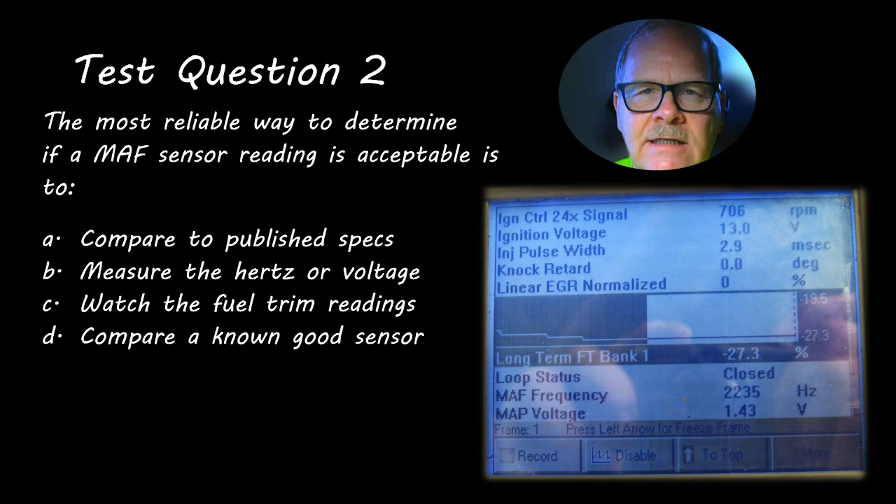Test question 4: Which of the following is continuously monitored? TP and ECT sensor, catalyst and evap, EGR and fuel trim, or hydrocarbon factor?

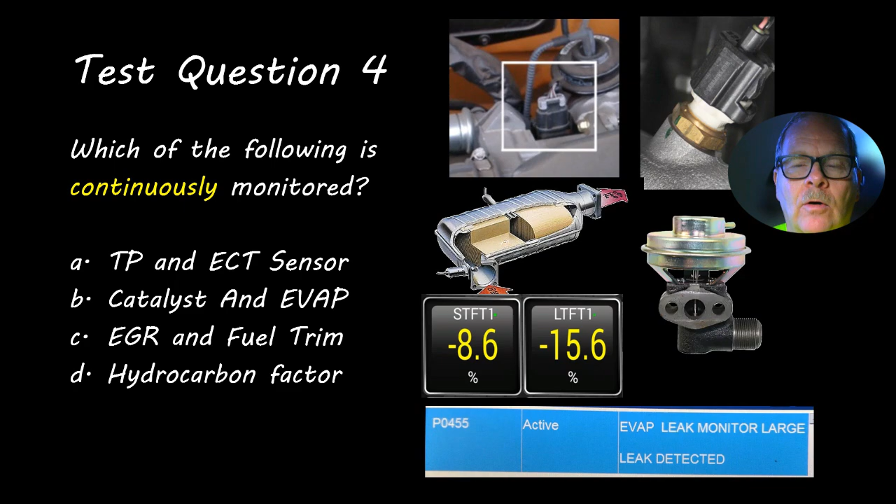Test question 5: Which of the following is least likely to be the cause of induction backfire? A, lean air fuel mixture, B, bad mass airflow sensor, C, downstream O2 sensor, or D, crossed plug wires.

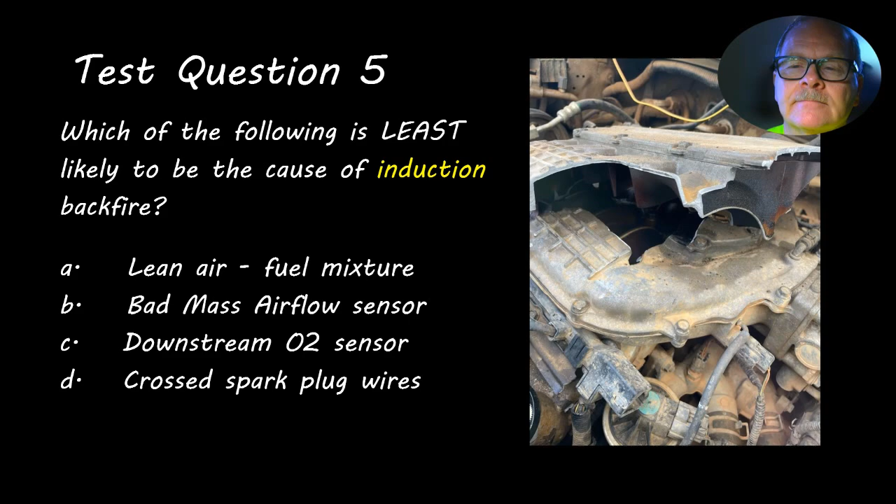Test question 6: O2 sensor values that read lean on hard acceleration may be caused by A, uncommanded EGR flow, B, kinked or pinched return line, C, fuel pump circuit voltage drop, or D, stuck closed injector relay.

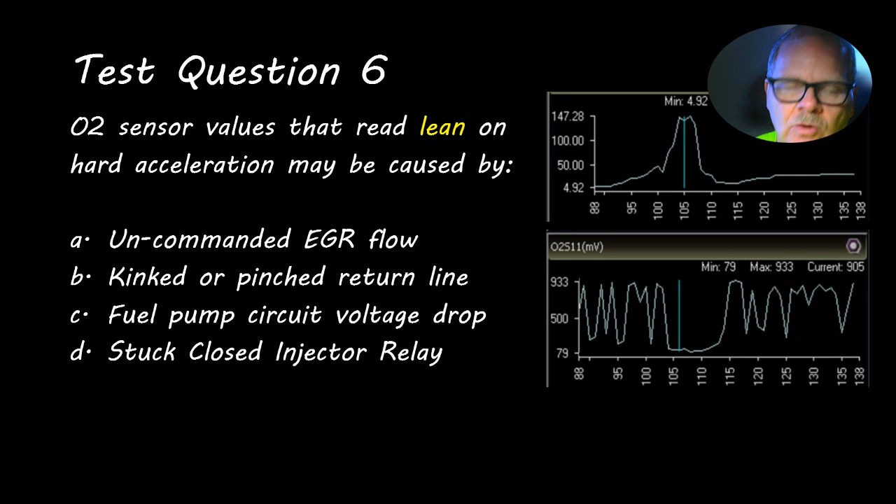Test question 7: A suddenly misfiring cylinder due to a bridged spark plug can cause A, a lean O2 signal and higher fuel trims, B, a rich O2 signal and lower fuel trims, C, all injectors to begin to fire sequentially, or D, unauthorized evap and EGR activation.

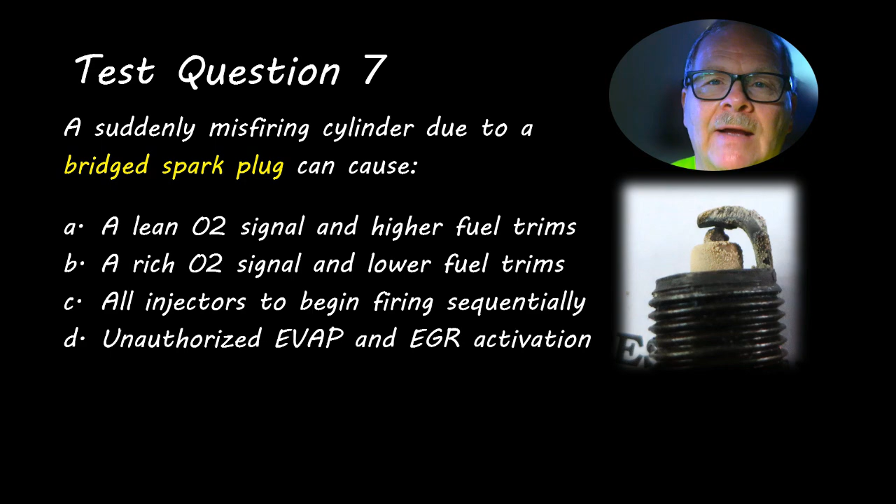Test question 8: An open intake air temperature sensor can cause A, hard starting, B, induction pop, C, no symptoms, or D, an ECT code.

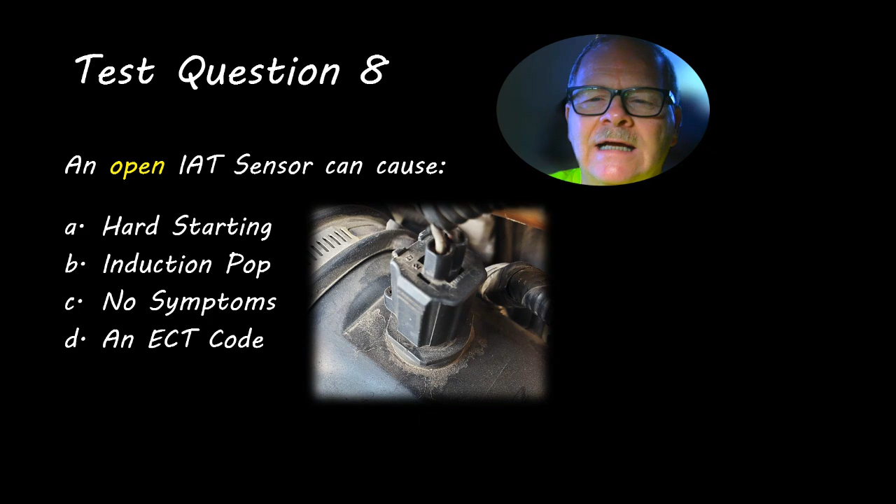All right, now here's your answers, and we'll talk about these as we go.

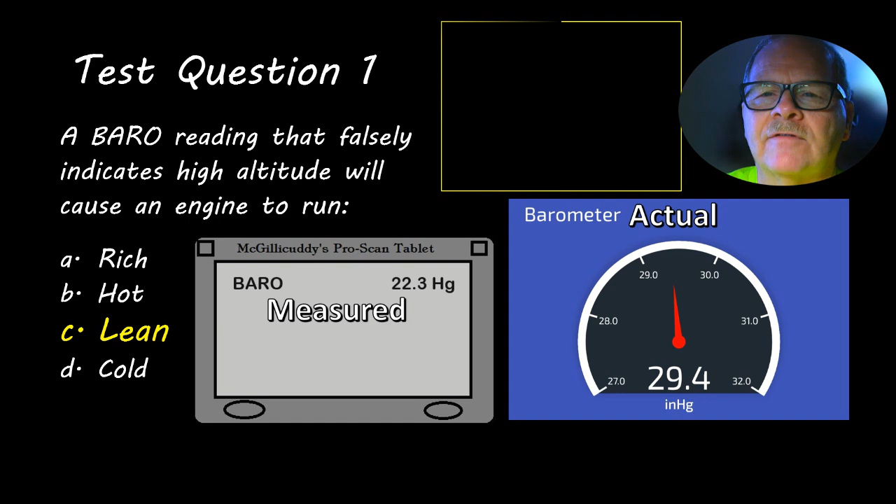A baro reading that falsely indicates high altitude will cause an engine to run lean. A lean mixture burns hotter than a rich mixture, but won't cause the engine to overheat, except in very extreme circumstances. If it doesn't think there's as much air, it's going to put less fuel in there.

There was a Jeep one time that a buddy of mine was working on, and it had thrown him a bunch of lean codes. We'd seen oxygen sensors flatline and cause that before, so he threw an oxygen sensor at it, and it didn't fix it.

What you do is look at your fuel trims. Whenever you first crack into that data stream, if the long fuel trim is way out of kilter and the short fuel trim is at 0, it means the long fuel trim has had to go way out of kilter to put the short fuel trim back at 0. Its job is to keep the short fuel trim near 0, because that means it's doing a balancing act to keep the emissions as clean as possible, despite any unbalancing situation to the rich or lean side.

So what he had done was incorrectly assume the oxygen sensor wasn't telling the truth when actually it was. The fuel trims were up around 27% plus. Whenever I looked at his scan tool, he and I were looking at it together, because I just happened to go by.

This was after I started teaching, and I was over there on a Friday. I said, look at this barometric pressure. Today's prevailing barometric pressure is about 29, but this is showing 22. I said, this is a problem, and that's going to be the reason you're running lean and correcting to the rich side. So he went and got a MAP sensor from the parts department, popped it on there, and evened everything out.

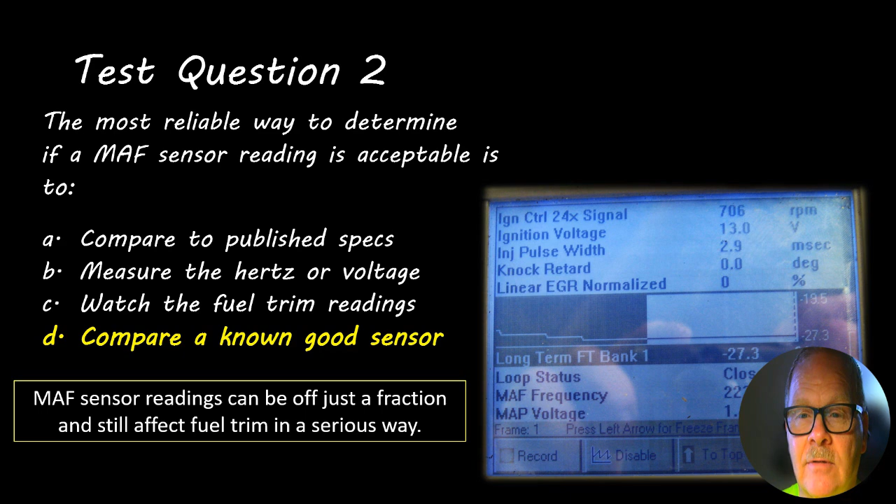The most reliable way to determine if a mass airflow sensor reading is acceptable is to compare it to a known good sensor. I know that sounds ridiculous because you may not have one, and a lot of times the parts house won't take back an electronic part once you've tried it. But the shop manuals for years would say try a known good part—well, that only works if you have a known good part.

The mass airflow sensor reading can be off just a fraction and still affect fuel trim. I talked about that some last week. Remember the Ranger I mentioned that was healthy with good fuel trims? All I did was put in a mass airflow sensor reading just a tiny bit off, and the fuel trims dove off in one direction because the oxygen sensor picked up the wrong amount of fuel, and the engine controller depended on that input to determine fuel trim. The fuel trim was thrown off by an inaccurate mass airflow reading—one you couldn't spot with your naked eye unless you compared it to another good sensor. That's the point.

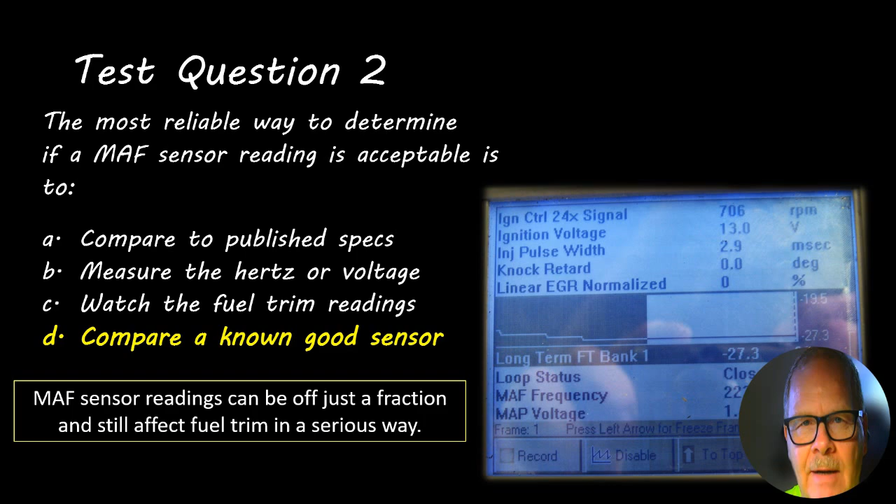When the throttle is open, TP voltage and mass airflow should be following each other. If you pull your TP and mass airflow up on the same tracking screen and apply your throttle, you'll see them jump together.

Now this right here—these are accelerator pedal position sensors on my Explorer. You can see how sometimes they mirror one another depending on the kind of car it is. Sometimes they follow one another and the voltages will be different. It's a redundancy deal—I just put that up there for an illustration.

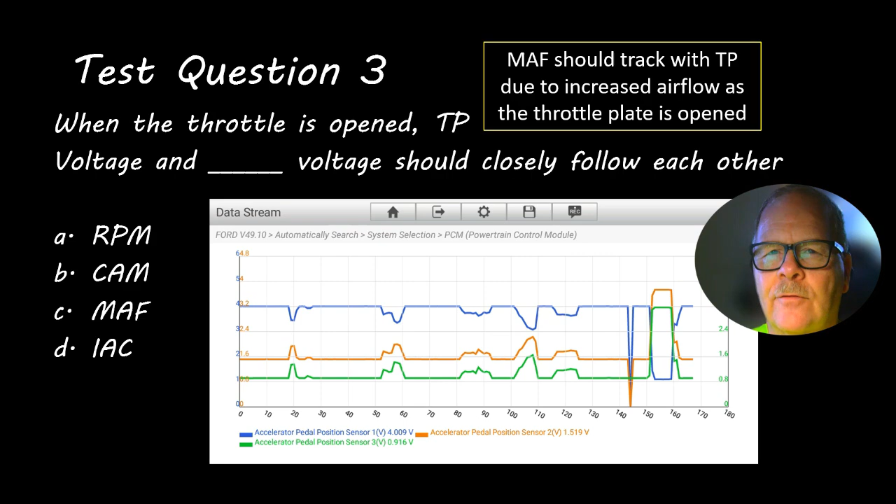Test question 4: Which of the following is continuously monitored? The TP and the ECT sensor. Everything else here is kind of bogus, not even a real deal. I used to throw these things in there, and it sounds good, but there's nothing to it.

One of my students was scratching his head because on a test I wrote at the college, one of the answers I put was heated hydrocarbon vent. That was just something I made up, kind of like hydrocarbon factor. You can actually read that if you've got an exhaust gas analyzer, but that's not the point.

So continually monitored, you've got TP and ECT. You couldn't say the oxygen sensor does this, because the oxygen sensor doesn't smell fuel. All it cares about is oxygen. But the EGR, fuel trim, catalyst, and evap...

Conditions have to be met before these can be checked. This one I consider kind of bogus. But the throttle position sensor and the ECT sensor are checked all the time. They can have in-range failures that the PCM will miss, kind of like the mass airflow sensor I was talking about from last week.

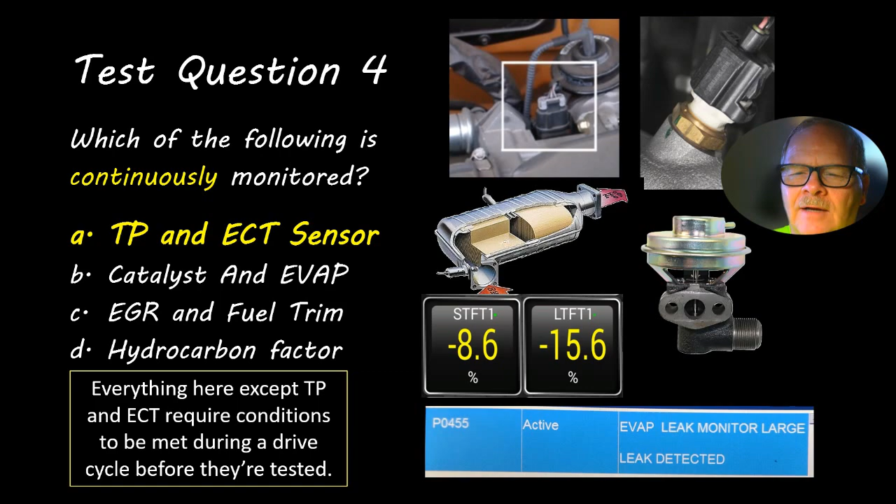All right, which of the following is least likely to be the cause of induction backfire? The downstream O2 sensor is not going to be the cause of that. Now, if the upstream O2 sensor goes flat on a lot of these vehicles, it will start using the downstream sensor to adjust fuel trim because it wants to keep the catalytic converter happy. If it can't trust the upstream and it knows it can't trust it, it will begin to take input from the downstream O2 sensor.

This picture was sent to me by a guy I know who owns a tire store. This is an aluminum upper intake, and it backfired hard enough on this one to break the upper intake. Crossed plug wires can make it backfire. A bad mass airflow sensor reading really, really lean is sort of rare. A lean air-fuel mixture can cause an induction backfire, but this kind of backfire is going to be very, very serious due to ignition being crossed up.

But the other ones can cause it too, they just won't blow the top off the manifold.

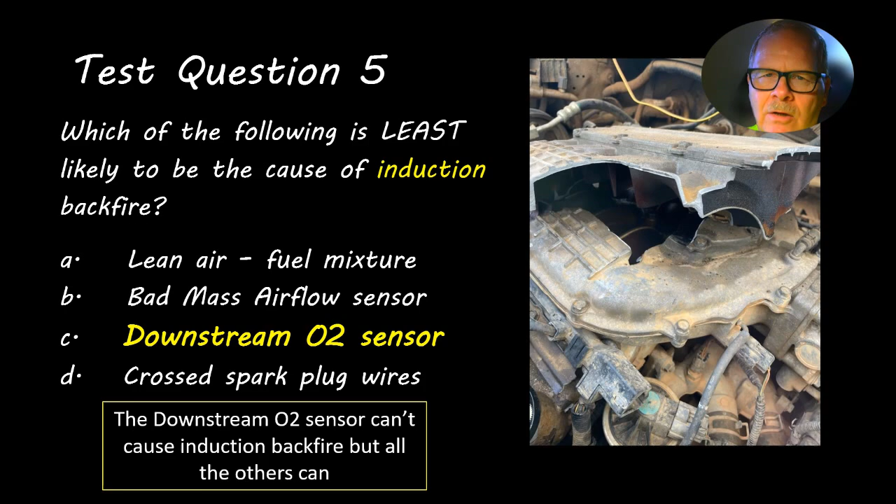O2 sensor values that read lean on hard acceleration may be caused by fuel pump circuit voltage drop. If the fuel pump's not getting enough voltage, there won't be enough fuel in there, and it's going to make it go lean.

Uncommanded EGR flow will actually make it drift a little rich, make it idle rough, but driving down the road it would drift a little rich. A kinked or pinched return line would raise the fuel pressure, and that's not going to make it read lean on acceleration. A stuck closed injector relay is just going to keep the injectors powered up, but it's not going to trigger them so they're open all the time or anything like that, and it won't prevent them from being triggered.

If I put stuck open injector relay, that might have been a little different. But the long and short of it is, if you get on the throttle real hard and the oxygen sensor goes lean and you're feeling a loss of power, I'd be looking at fuel pressure just to see what was going on. Fuel pump circuit voltage drop can cause that.

That being said, some of the earlier vehicles right after the fuel injection years started, like Jeeps for example, had a current dropping resistor, so there was only about 8 volts going to the fuel pump after you started it. They did that to keep the fuel pump from making so much noise.

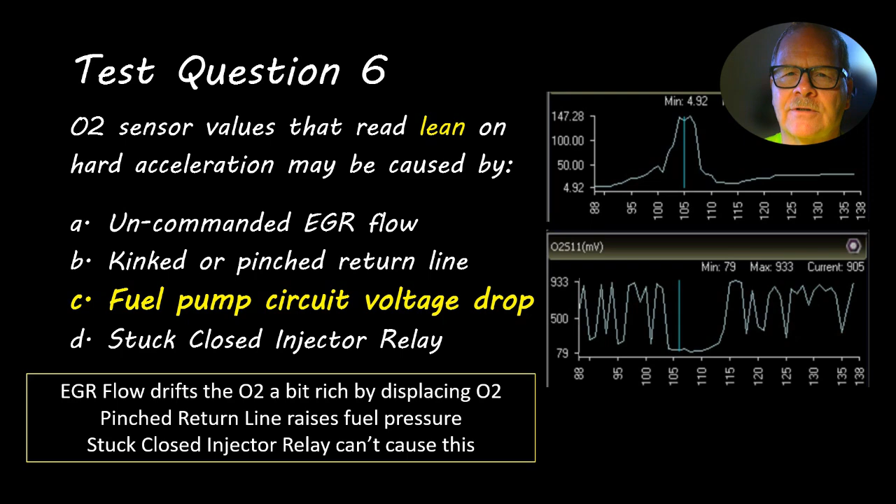Question 7: A bridged spark plug suddenly misfiring will cause a lean O2 signal and higher fuel trims because it will send unburned fuel and oxygen or air into the exhaust stream, and the O2 sensor doesn't see the fuel, only the air, so fuel trim increases.

Now, when the entire engine begins to be affected by this, it's a fruit basket turnover. Furthermore, on just about every platform out there now, if one cylinder begins to misfire, the engine controller will shut the fuel off to that cylinder.

You can test that by killing a cylinder - shorting the spark plug or unplugging the coil, not the injector - while listening with your stethoscope or using your light flashing tool. If you kill that cylinder, it starts misfiring. If you're listening to that injector, you'll typically hear it stop clicking because it's detected a misfire on that cylinder. It doesn't want that fuel going in there and cooking the cat.

Remember, these algorithms are largely written to protect the catalytic converter as much as it's electronically possible. It's not possible if the injector has mechanically failed and is squirting fuel straight in there, or if the circuit going to it is shorted to ground. The PCM can't do anything about that, but it wants to protect that catalytic converter because it's on them for the first 80,000 miles, and they don't like buying catalytic converters under warranty.

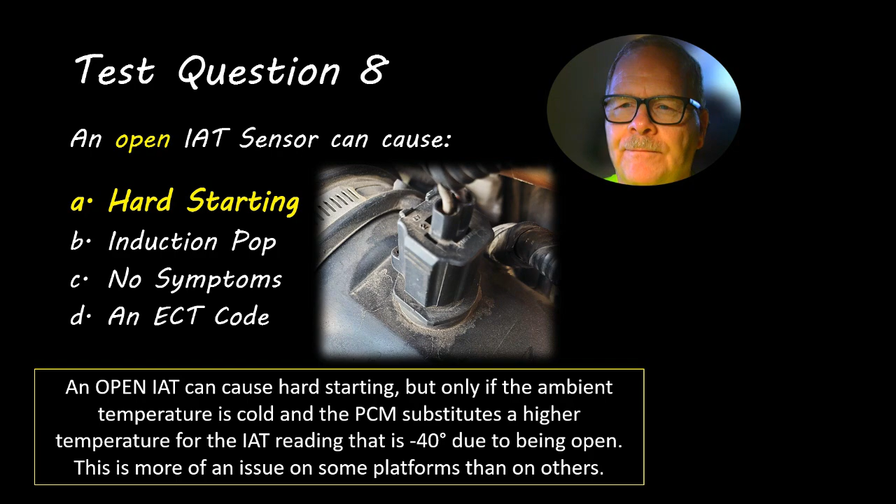Anyway, you can check fuel pressure if you want to, check spark timing if you want to, retrieve all DTCs if you want to. Most mechanics like to plug their tool in to see what the code is. But the smart thing to do, and what the OEMs will tell you to do, is verify the concern before you do anything else. If you retrieve the DTCs first, don't clear them until you've stored them all, including your freeze frame data - make sure you got all that stuff snapshotted.

You always need to verify the concern before you do anything else. If you just jump in there and start doing repairs without verifying the concern, you may find yourself working on something they weren't even complaining about or didn't know about. Then when you give it back, they say, that's not what I was talking about, I still feel blah blah. You see what I mean?

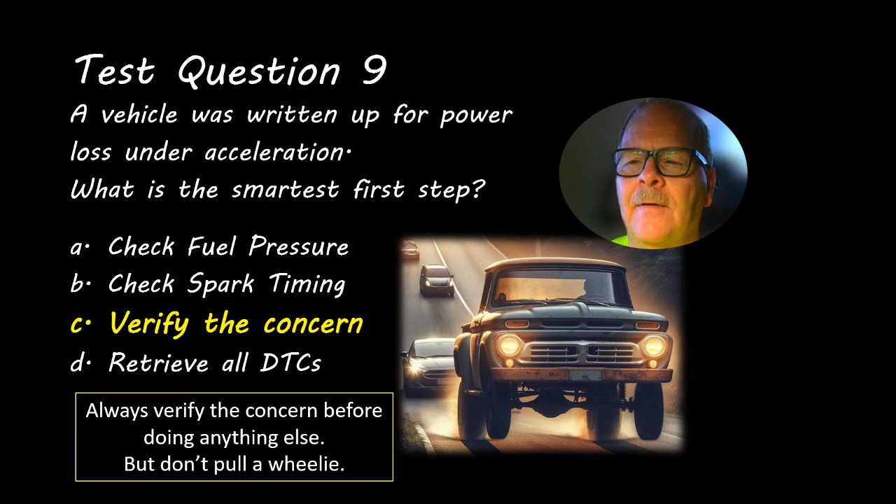When releasing the throttle, the engine intermittently fails to return to idle. If the throttle position sensor is reading part throttle, it will do that because it's in dashpot mode, which is waiting for you to completely release the throttle so it can slowly bring the idle back down. If it still sees part throttle, it's going to hold the idle air control up. You're looking for about 700 RPM, but you're getting 35%, 978.

Whenever you piddle around with it, what we do is pinch and twist on those wires at the throttle position sensor, the one this was taken on. I wound up having to disconnect those wires out of the throttle position sensor and pull the things up to where they were standing up straight. The little crimps and wires looked beautiful—there was nothing wrong with the pin fit, but I soldered every one of the connections where the wire was connected to the terminal. When I put it back together, it never gave that problem again. Ford actually had a bulletin wanting you to replace the connector and the TP sensor for that, but all you really needed to do was this.

I also fixed my dad's vehicle one time because it turned on a check engine light, was running funky, and kept throwing codes. A replacement mass airflow sensor, which was the code it was pointing at, didn't do anything. So I pulled the wires out of the connector and soldered those the same way I did that TP sensor, and fixed that one too. So sometimes it's something like that.